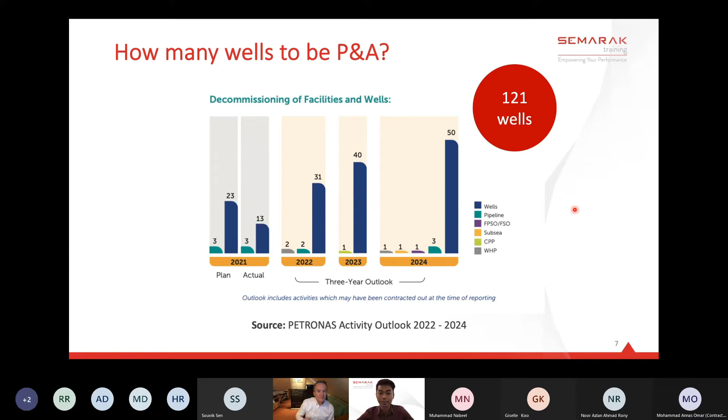With that, I would like to introduce our speaker today, Steve Jewell. He's our principal expert trainer on well abandonment, a UK-based decommissioning advisor. This year he has 41 years of experience in the oil and gas industry, with expertise covering well construction, drilling, completion, workover, and abandonment, and also subsurface, geoscience, reservoir engineering, and production engineering. He has spent over 13 years working on various decommissioning projects across the world, focusing on plugging and abandonment of wells, which is the single highest cost in a decommissioning project.

Since 2019, he has trained P&A professionals in Malaysia from Petronas Carigali, Repsol, EnQuest, Halliburton, Archer, Sapura Energy, Vantage Energy, and Uzma. On a side note, he's also a UK Chartered Engineer, Fellow of the Institute of Materials, Minerals and Mining, member of the European Engineers, Institute of Directors, and of course, Society of Petroleum Engineers.

With that, ladies and gentlemen, sit back, relax, and enjoy the session. Please welcome Steve. Okay, thanks, Faiz. Let me just get my presentation up. Okay, I think we're good to go. Well, good afternoon, everybody. I know there are people from all over the world here. Where I am is Aberdeen. The sun would be coming up if the sky wasn't so grey. It's raining here. If any of you have been to Aberdeen, you'll know that's quite normal.

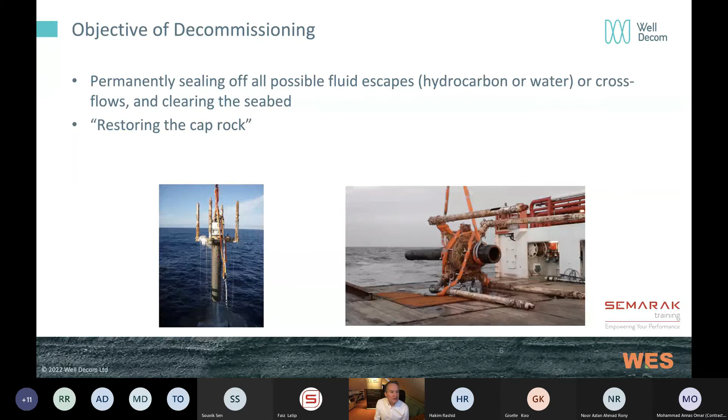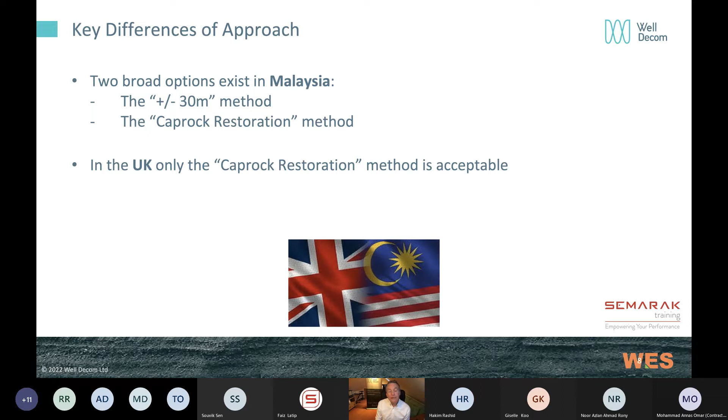The caprock restoration method is the only method that's acceptable here in the UK, and you can argue about whether that's appropriate in certain circumstances, but that's the way we do it here. It's the way it's done in many parts of the world. In Malaysia, you have an alternative. Okay, so I'm going to focus on the caprock restoration approach because it's more broadly adopted worldwide.

Okay, whatever way you approach this, wherever you're operating in the world, the objectives are broadly the same when it comes to well decommissioning. We want to prevent the migration of fluids, formation fluids, through the wellbore to the surface or the seabed. That's usually the thing we're thinking about most. But we also need to provide downhole isolation between hydrocarbon zones if ultimate recovery might be jeopardized due to cross flow. So we've got to think about different zones.

If we have two reservoirs which are hydraulically isolated, then they may need to be isolated as part of the decommissioning process in order to prevent cross flow between the zones. We may also want to prevent a cross flow between a hydrocarbon zone and a water bearing zone. So we need to think about that as well in the design. So those two things are very important.

We also need to think about protecting freshwater aquifers. Now, this is primarily an onshore consideration. So if we're drilling onshore, then freshwater aquifers near the surface need to be protected. This isn't an issue for offshore because the water, even close to the seabed, is going to be partly saline.

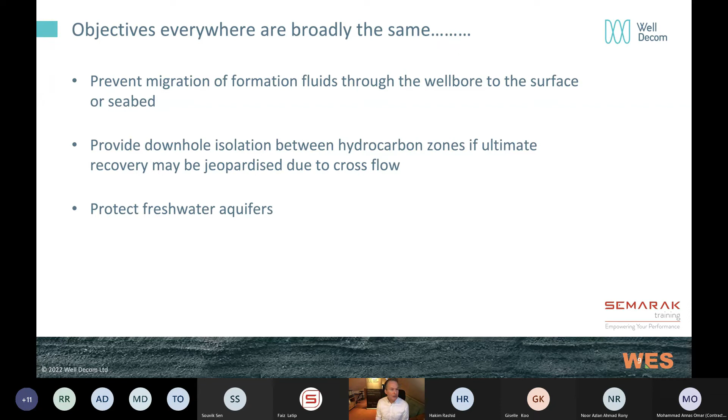Okay, so the Caprock method, just to talk about that a little bit. What does it mean? Well, essentially, it's about restoring the caprock. So the seal, the geological seal that exists to keep the hydrocarbons in the reservoir and has done for many millions of years, we need to restore that seal where we have penetrated it. In other words, where we've drilled a well through it.

So it needs to provide a continuous permanent barrier across all annuli in a suitable sealing formation. Okay, so that usually means the caprock immediately above the reservoir, but there are options if we have other sealing formations.

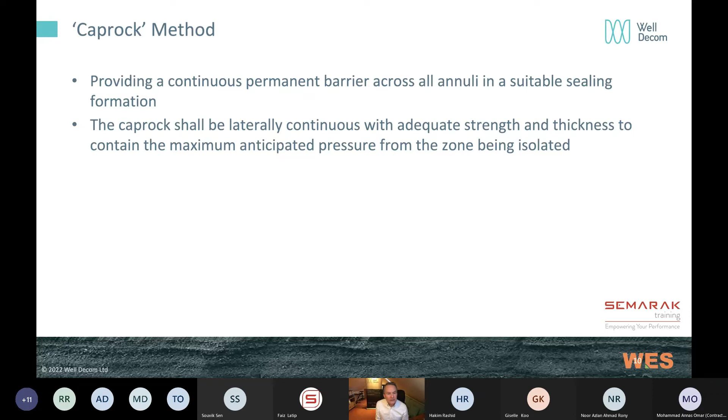Okay, the caprock should be laterally continuous with the adequate strength and thickness to contain the maximum anticipated pressure from the zone being isolated. So we need to think about how thick the caprock is. We need to be reasonably assured that it's laterally continuous across the reservoir. So we can't choose a formation which only appears in some of the wells in a particular reservoir. It needs to be present in all the wells. Otherwise, it may not be laterally continuous, and it needs to have that thickness there to sustain the maximum anticipated pressure.

Now, usually what that means is when we think about a reservoir and its initial pressure, if we drain that reservoir, the pressure may go down, and particularly in a gas reservoir, it may never recover. Usually the worst case we could anticipate is full recovery of virgin pressure. So if we've drilled into a reservoir, we've depleted it, the worst case in well decommissioning terms is that pressure eventually restores back to the pressure it was when we originally developed the field. And so when we think about the caprock that has to withstand a pressure as part of the decommissioning, we generally think about the original reservoir pressure.

Okay, the permanent barriers need to isolate both inside the casing and the annulus between the casing and the caprock. And this is probably the most important aspect of well decommissioning that we give most thought to. But we tend to forget the annulus. We tend to focus on the cement, usually, that we put inside the casing. And where are we going to put that? How long does it need to be? And is it going to withstand the pressure? But whilst we need to think about that, we also need to think very hard about the cement in the annulus, which is going to lay alongside the plug that we plan to put in there.

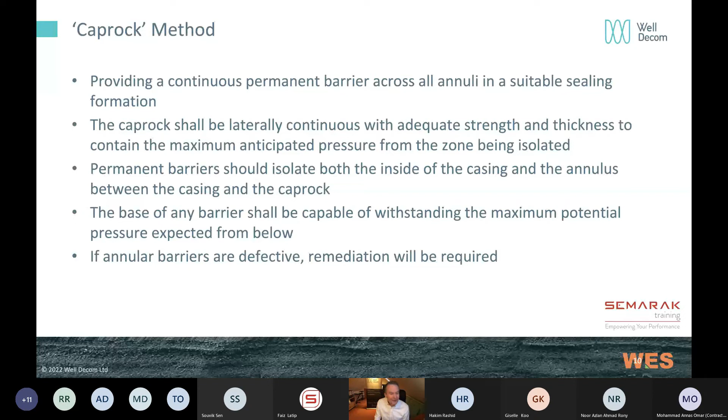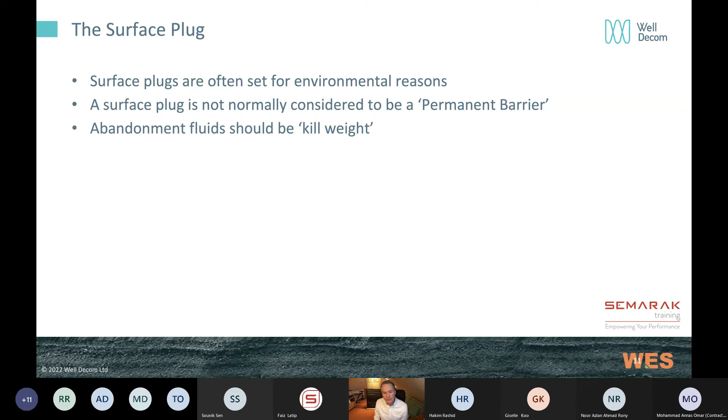Okay, the surface plug isn't normally considered to be a permanent barrier. In other words, it can't withstand the reservoir pressure. If the reservoir pressure were to come below the surface plug, then we can't rely on it as a barrier. And the other thing to just take a note of, between the permanent barriers, which will be deep in the well, and surface plug, generally we fill the space with what I would describe as abandonment fluids. Whatever fluid is left in there should be of kill weight. In other words, it should have sufficient density to withstand the anticipated maximum pressure from the formation below.

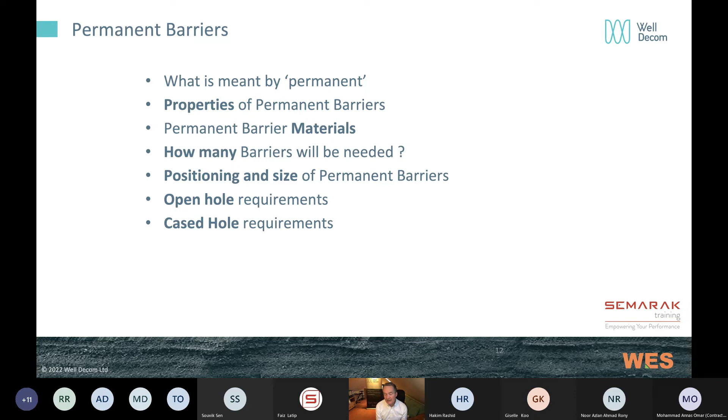Okay, so permanent barriers. What are the permanent barriers? So these are the plugs whose job it is to keep those fluids back in the reservoir. They are often referred to as permanent barriers. So I'm going to go into a little bit of what does that mean? What does permanent mean? Some of the properties of permanent barriers and what sort of materials we would use in order to give us the right properties. How many barriers we're going to need? That's obviously a question we need to answer today. The positioning and size of the permanent barriers, what we think about in those terms, and open hole and cased hole requirements and how they may differ. Okay, that's what I'm going to talk about now.

So the first question is, well, what does permanent mean? I've listed a few definitions here, and I don't really want to get into the subtleties of language, but you can see if you read these some intricate use of English to try and describe what permanent means. So lasting or intended to last or remain unchanged indefinitely. That means forever. Existing perpetually, that means forever. So we get into some semantics here about what permanent means.

I think, practically speaking, from a pragmatic point of view, we must do our very best to design the plugs so that as far as we can reasonably foresee, they will last forever. Now, we don't know what's going to happen over millions of years, but I think we do know what could happen over 1,000 years or maybe even 10,000 years. And I think that's the basis on which we should be thinking about our permanent barriers.

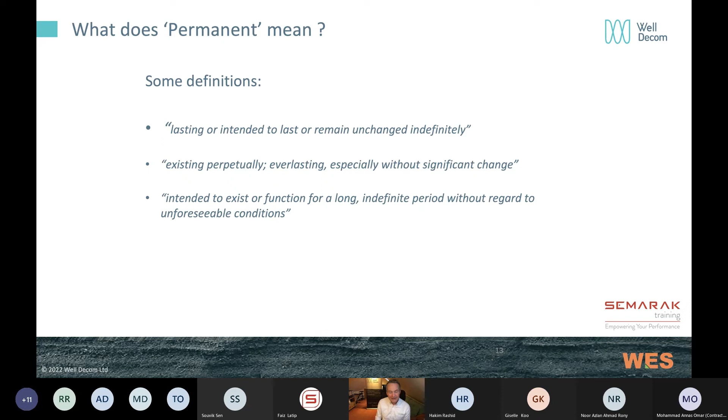What sort of materials can we use or should we use for permanent barriers? Well, the properties that we need are a barrier with very low permeability, so low effectively we don't have flow through it. Even cement has a permeability, but it has to be very, very low. Just as a caprock has permeability, it's extremely low, and if it's sufficiently thick, we're never going to see any flow through it. It needs to provide an interface seal. So in other words, with the casing, if we're putting cement inside the casing, we need to get a seal between the cement and the casing. We don't want it to move. If it moves, then it may introduce flow paths. So once we put it in place, it needs to stay there.

It needs to provide long-term integrity. Well, in fact, it needs to provide integrity forever, is what we're trying to design. So that's on a permanent basis, as far as we can reasonably do that. It needs to be resistant to all downhole fluids. So, in most reservoirs, we may be thinking about gas and oil, sweet oil. But as I'm sure you know, some reservoirs are sour. We may have H2S, we may have CO2. There may be other fluids which we produce, which could attack the materials that we're using. So we need to think about the fluids present and the materials that we're using so that we can reasonably expect that they're going to last a very, very long time.

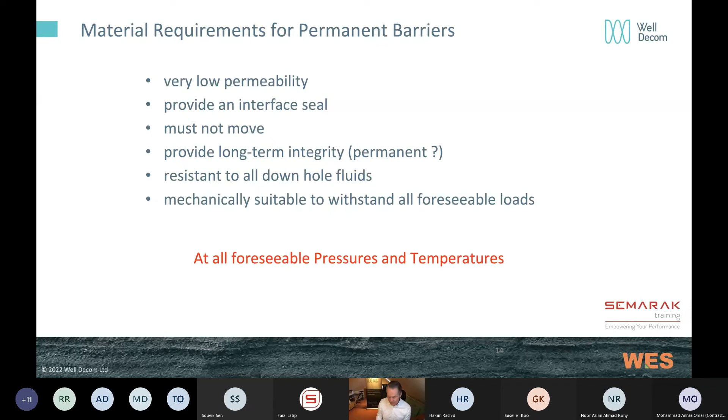So we need to think about foreseeable loads, and ultimately the permanent barriers need to be effective at all foreseeable pressures and temperatures. So we need to think about pressure and temperature in the subsurface and how that might affect the performance of our permanent barrier. So what material could we use? Well, 98, 99% of permanent abandonment plugs will be made from cement, usually class G. This is a universally deployed material. It is very effective, and it's cheap. So cement is the material of choice.

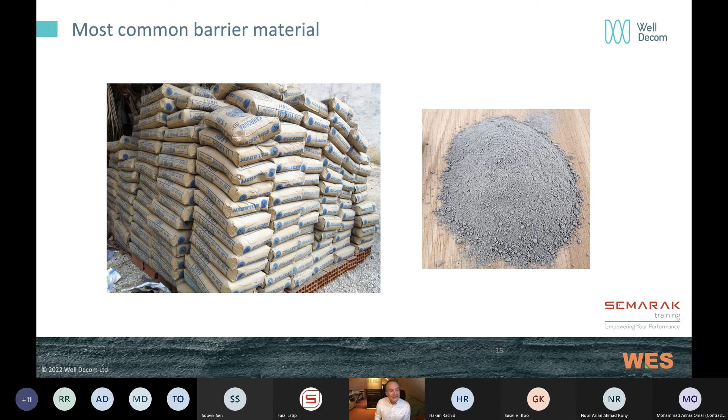Now there are many other materials which can be used or could be used, and are being developed as part of new technology. So different types of resins, even alloys, bismuth alloys can be used as alternatives. But for the vast majority of abandonment, we will probably be using cement because it's readily available, it's cheap, and it's highly effective. Okay, so that's what we expect of our permanent barrier, and the sort of materials we might use.

Another key thing we have to think about when we're thinking about where we place our plugs is what's described in the UK guidelines as zones with flow potential. Now, the most obvious zone with flow potential is the reservoir that we're trying to seal off, to isolate. Clearly, it has flow potential. It has permeability. It has the ability to flow to surface. That's why we've developed that particular reservoir.

But there may also be other zones higher in the geological section which also have the potential to flow. And we need to consider where they are, because we may need to isolate them from the reservoir, and we may need to isolate them from each other. So the things we need to think about are the potential of each of these zones to outflow to surface, so can they reach the surface? Potential flow between the zones in the subsurface. Consideration of flow, for instance, of hydrocarbons to usable water aquifers. This is an onshore requirement; don't need to think about that too hard for offshore.

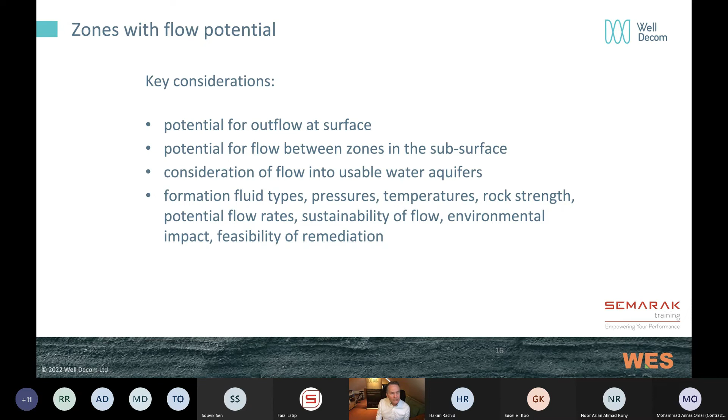And then, of course, we need to think about the different formation fluids in these zones, the various pressures and temperatures. Some may be overpressured. The rock strength, potential flow rates, the sustainability of flow. So some formations close to the surface may have a little bit of gas, but it's maybe shallow gas which will deplete. So how sustainable is the flow? The environmental impact of any escapes, and the feasibility of any remediation if the worst happens and we get flow to surface. So these are some of the things we need to think about with zones with flow potential.

Okay, so we talked a little bit about the barriers there. How many barriers do we need is a question we need to answer today. What I've done here is extracted from the UK guidelines, and I think they're generally pretty robust and applied in other places. If anything, in other places you may be a little more conservative in thinking about how many plugs, but basically all zones with flow potential identified need to be isolated from each other. They need to be isolated from the surface, and with a minimum of one permanent barrier. So this is the minimum requirement.

If we only have a reservoir where we've taken oil and gas, but no other formations with flow potential, then we should be able to isolate that reservoir with one barrier. That's the minimum requirement. However, we may want to think about two barriers if a zone requiring isolation is hydrocarbon bearing and/or is overpressured and water bearing. So either of those.

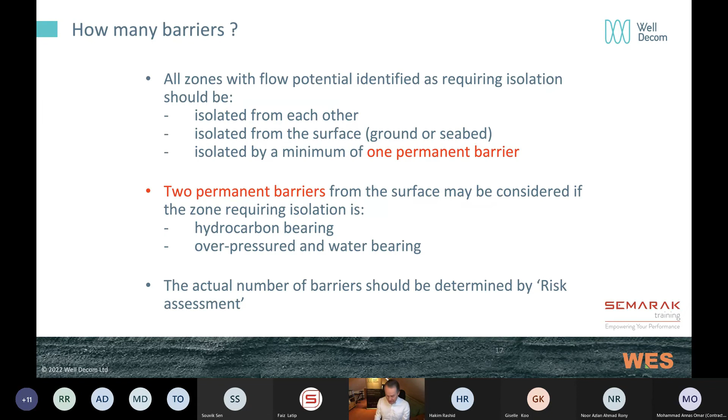But the assessment of how many we actually need in our particular case, good practice says that we really ought to do it by risk assessment. In other words, we shouldn't just rely on what it says in the guidelines. We should think about the risks of our particular scenario and how we're going to achieve the principles, which is to prevent the flow of fluids to the surface, to other formations on a permanent basis. Okay, and so what I would recommend, and what good practice really says, is that you really ought to do a risk assessment to determine how many barriers you will need in your particular well.

Okay, so position of barriers. I'm going to show you some examples towards the end here to give you a flavour for how many barriers we need. The position of the barriers. Well, if we've got two barriers, the primary one should be set above the zone with flow potential and across a suitable caprock. So again, if we're abandoning a reservoir, this is reasonably straightforward. We know there's a caprock immediately above the reservoir, and so that's typically where we would want to put our primary plug. If we're setting a second plug, then it also should be set across a suitable caprock.

Now that may be the same caprock that sealed the reservoir in place, but it doesn't have to be. It may be a second caprock or sealing formation higher in the stratigraphic column, higher in the section. So of course, if we're doing that, we need to make sure, as I said earlier, that that particular formation is laterally continuous across the reservoir. Otherwise, we might find that we've got a leak path. Okay, so they're the principles.

In all cases, the barriers need to overlap good annular cement. So it's no good just putting a good cement plug inside the casing. The cement outside that particular place also needs to be good. And the formation fracture pressure, of course, at the base of the barrier needs to be greater than the maximum anticipated pressure. In other words, that plug needs to withstand the maximum anticipated pressure we would expect to see below that plug.

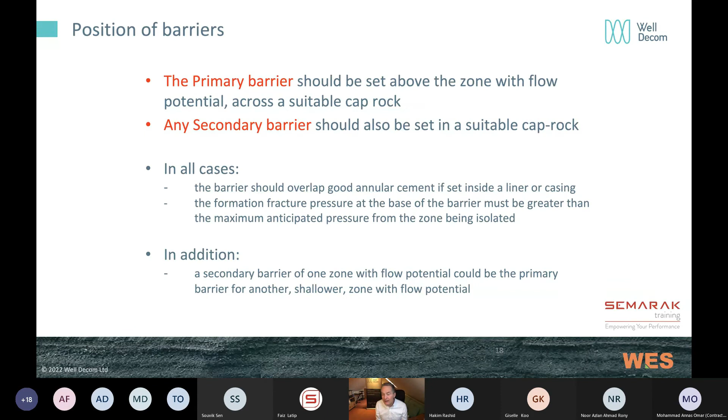In addition to that, a secondary barrier of one zone with flow potential could be the primary barrier for another shallower zone with flow potential. Okay, so that's sounding a little complicated. I'll illustrate this with an example shortly. But basically, a secondary barrier, thinking about one zone, can act as a primary barrier to a second zone. So I'll show you that shortly.

Okay, so primary and secondary barriers. This is how they might look in one example. This particular example has two zones with flow potential, zone A and zone B. So you can see, looking down at the bottom first, zone B, we would put a primary barrier above that zone, and you can see that the cement across that plug, I'm not showing any lengths at the moment, the cement across that in the annulus needs to also be sealing and good.

And then if we've got a second zone, zone A, above it, you can see the primary barrier to zone A sitting above, and then a secondary barrier to zone A sitting above that. Okay, the primary barrier to zone A is acting as a secondary barrier to zone B. So in other words, we've got two zones, and effectively we've got two barriers for each zone. But of course, we've managed to achieve that with only three barriers.

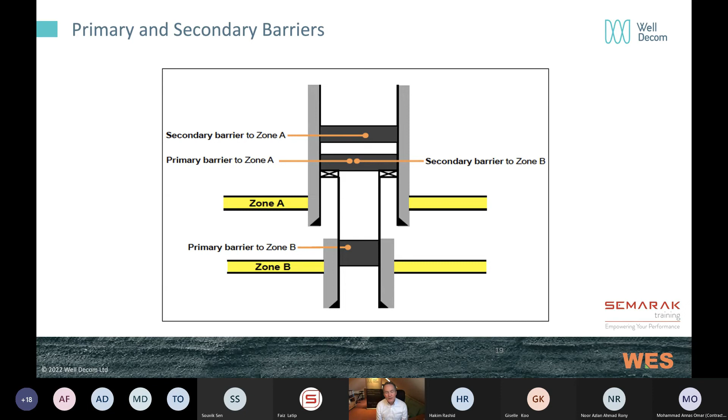Okay, so this can be a little complicated if you've got multiple zones that you need to isolate from each other. It's generally not that difficult. We can usually identify the zones with flow potential reasonably easily and design our plugging scheme reasonably simply. Okay, so this is showing individual abandonment plugs, permanent plugs, but we haven't got into precisely where they're located or the actual length, and we'll talk about that shortly.

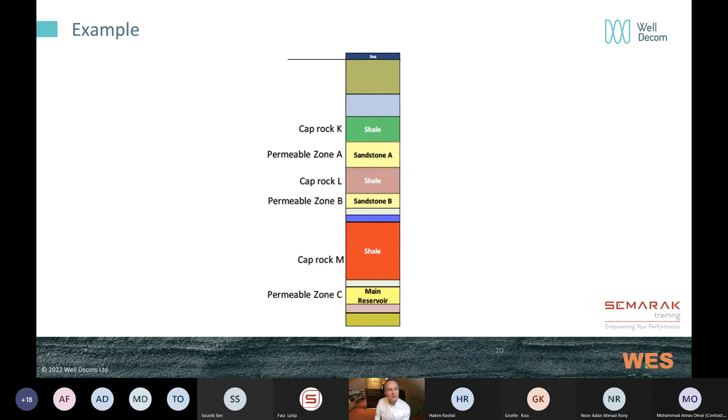Okay, so to give you an actual example, here's a stratigraphic column, simplified, of course. We've got the main reservoir near the bottom there, permeable zone C, and then we've got two other permeable zones, sandstone B and sandstone A, higher in the section. And in between those, we've got different formations, but three different shales, which I've classed here as caprocks. So Caprock M near the bottom, the red one, Caprock L, and Caprock K. So a series, and this is very typical of what we'll see in a well.

So if we're trying to abandon this particular reservoir, so the main reservoir at the bottom, we need to think about those two sandstones, A and B. And this shows a scheme of abandonment where each of these is isolated from each other, and the main reservoir is also isolated. So starting at the bottom, you can see the main reservoir. In this particular case, the tubing has been cut and two barriers against the reservoir have been set just above what was the packer near the bottom there.

And then going higher in the well, we've got two bridge plugs and then two cement plugs put on top. And this provides isolation between the main reservoir and sandstone B, that's provided by the main barriers. And then between sandstone B and sandstone A, we've got two barriers, and then ultimately sandstone A is sealed off from the surface using those two barriers against sandstone A. So in this particular case, we've used 6 barriers to isolate 3 zones of flow potential, which includes the main reservoir. All right, so these are thinking about these barriers as individual barriers, but of course there are ways in which we can combine barriers, and I'll mention that very shortly.

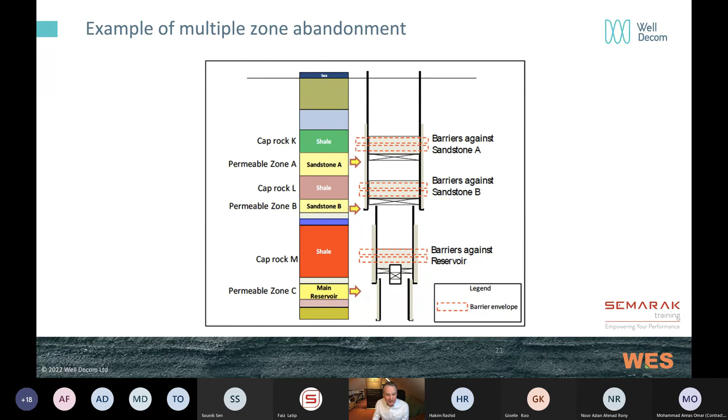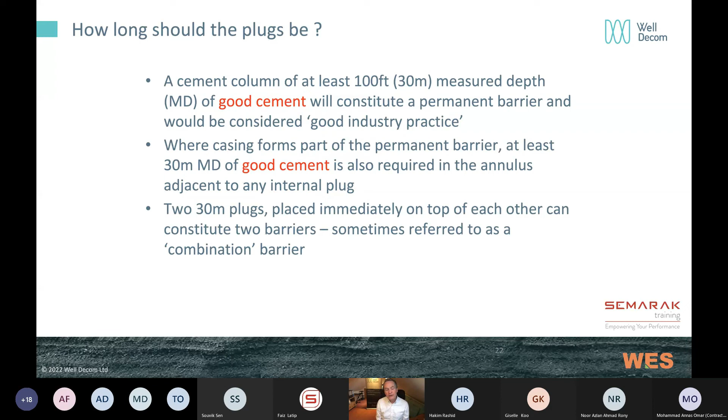Okay, so how long should the plugs be? Well, this is a how long is a piece of string sort of question, and what I would say is that the cement column needs to be at least 30 meters or 100 feet in length. It needs to consist of good cement to constitute a permanent barrier, and this would be considered to be good industry practice. Where the casing forms part of the barrier, in other words, it's not open hole, then we need that to be good in the annulus, as I mentioned, adjacent to the internal plug. We can combine 2 plugs, and sometimes we refer to this as a combination barrier.

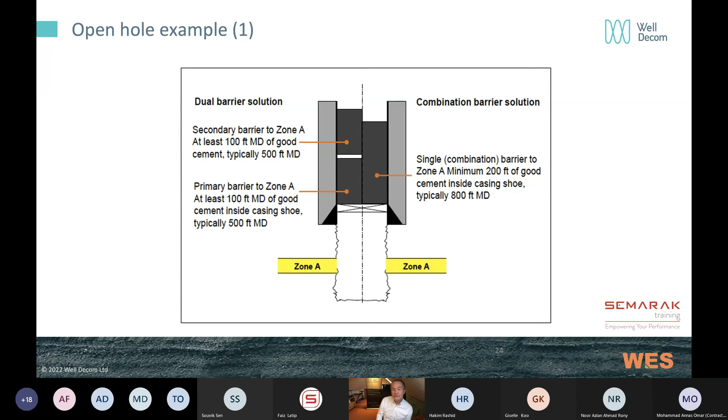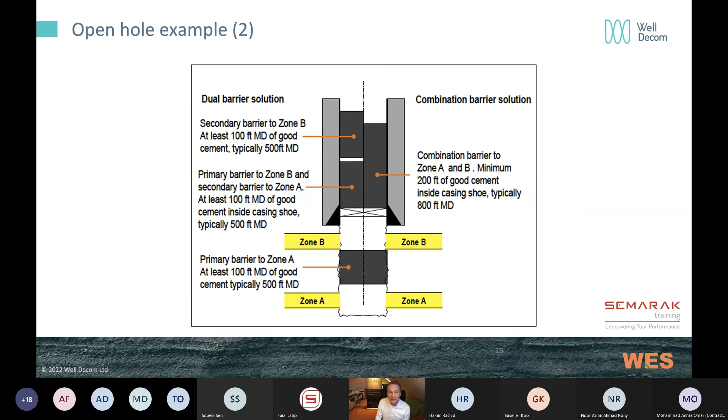Okay, I'm going to go through very quickly because I've just noticed the time, so very quickly, just some examples. Here's an open hole example where there's one zone to be isolated. So we can put in 2 100-foot barriers of good cement. Or alternatively, we could put in a slightly longer barrier. This is looking at old UK guidelines, in fact, of maybe 800 feet, and that effectively acts as a double barrier. The same for 2 zones, Zone A and Zone B here. We've got some isolation between the zones, and then the same scheme inside the casing.

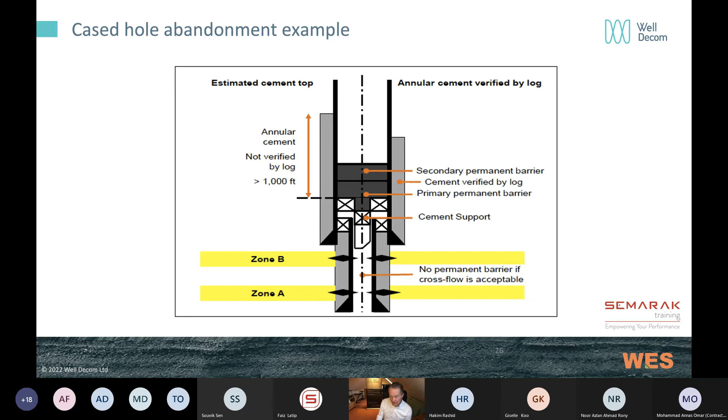Cased hole example, we've got here, again, looking the same as the example I just showed earlier. Tubing's cut, we set a combination barrier or two barriers above the tubing, and that's going to isolate Zone A and B. If Zone A and B are in the same pressure regime, maybe they've been depleted as part of one reservoir development, then we maybe don't need to isolate them from each other. And so those 2 barriers act as an isolation for the entire reservoir. Remember that the annular cement has to be good where we set the 2 permanent barriers inside the casing.

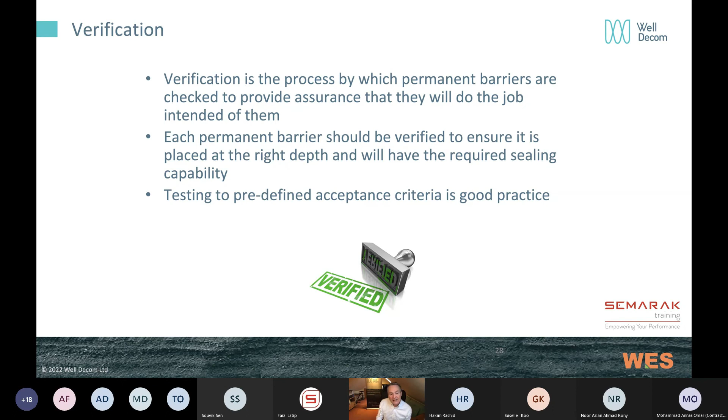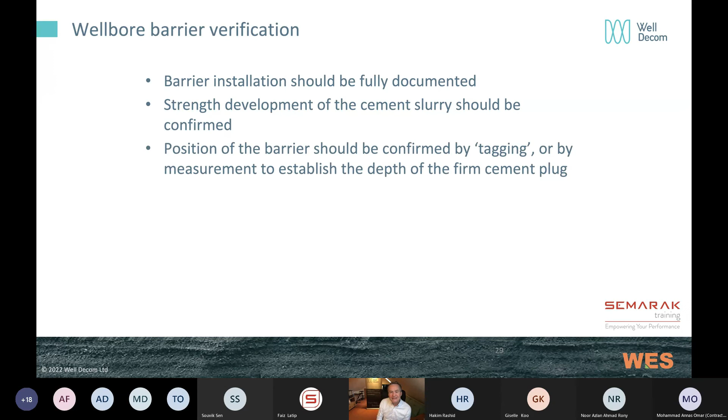Okay, just a little bit on verification. I'm going to speed through this. Verification, of course, is how we check that our plugs are good. We need to verify them to make sure that they're in the right place, that we set them where we said they were, and that they can achieve the required sealing capability that we've set ahead of time. So we may test to a predefined acceptance criteria. That's good practice. Okay, so we need to fully document our barrier installation. We may want to check the strength development of the cement slurry and get that confirmed. We can check the position by what we call tagging, or measuring the depth of the firm cement plug.

And in open hole, we can verify with a weight test. In other words, we apply weight to the cement plug, typically 10 to 15,000 pounds, with a little bit of rotation in case the plug moves. If we use wireline or coiled tubing, then we're weight limited. We may not be able to verify that adequately.